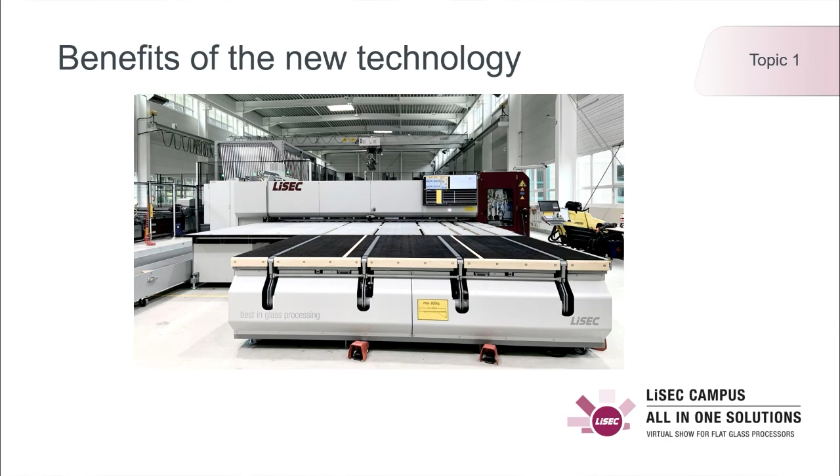Additionally, we saw that the laminated glass cutting demand, which we and you as a customer have to cut, is dramatically rising in the upcoming years. It is mandatory that we supply a solution that cuts more laminated glass in the same time, with better quality, much higher efficiency, and that means reducing waste glass and reducing costs.

So the three benefits we offer with the new technology are, as mentioned, better quality, less costs, and higher output. Now I will explain what is behind better quality, less costs, and higher output.

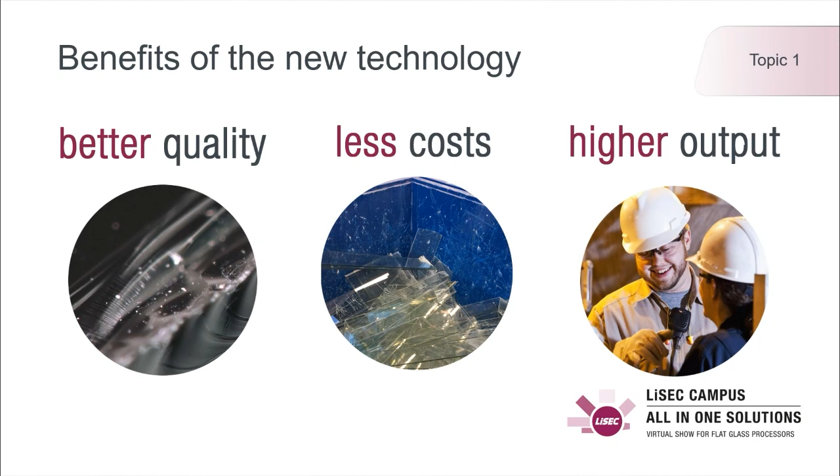Let's start with better quality. This is a very important point, because as we all know, the laminated glass cutting quality available on the market, supplied by all suppliers, is not always stable. Sometimes the glass is in good condition, sometimes in worse condition - the glass is stressed, the edges are damaged, etc. So we thought, what can we improve with the new VSL-A cutting technology to handle these different kinds of glasses, and how can we provide our customers the best result after the cutting process?

First of all, very high process stability is mandatory. What we did is a huge change in terms of our technology. For the last 20 years, we used vacuum suction cups to clamp the glass from the bottom side and open the gap between the two pieces of glass to cut the PVB layer.

This vacuum suction cup technology sometimes has problems with different glasses and stressed glasses, so we decided to develop the new technology called clamp technology. We no longer use vacuum suction cups, which sometimes caused problems. Now we use clamp technology.

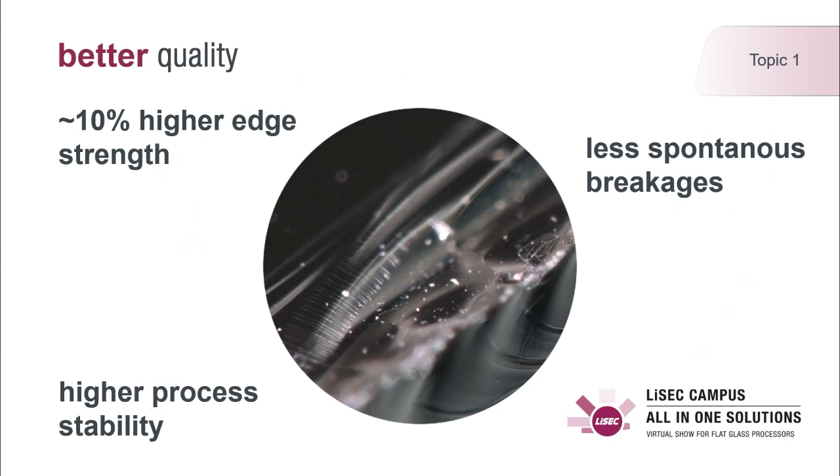You see here the number around 10% is the edge strength higher compared to other available solutions on the market. I will show you now in a short video how we found out these 10% during the tests.

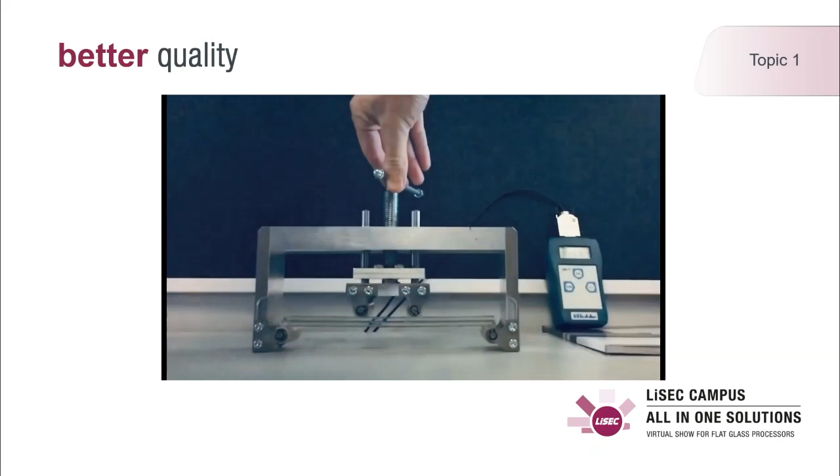This is a 3-point bending test. We cut a lot of pieces with existing technologies, laminated glass cutting bridges on the market, and we cut the same number of pieces also with our new VSLA technology, and started the test. We put these pieces into a machine - this is now just a model of the machine. The real machine is a highly optimized 3-point bending test, putting force onto the top of the glass and measuring when the glass breaks.

In this test procedure, we found out that there is a significant difference in terms of edge strength between existing technologies and our new technology. Our opinion is that because we have improved the cutting and the heating, we decreased the micro cracks, and because we decreased the micro cracks, this is the result of better edge quality.

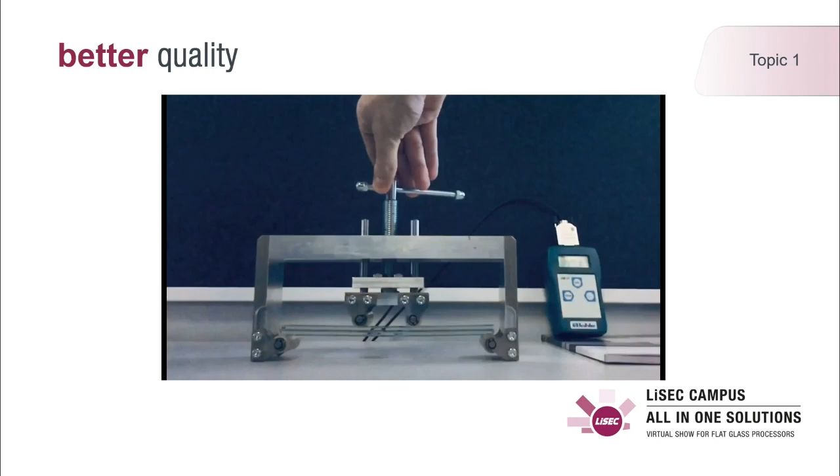So by the end, some further benefits of good edge quality. If you're, for example, someone who is processing glass, less grinding addition is needed. And by the way, the accuracy of the glass sheets which we produce with the VSLA is very accurate, around 0.2 millimeters plus minus.

Here we see a final result of this kind of edge quality. The surface is perfect, 90-degree angle, and also the dimensions are, as already discussed, 0.2 on the length side, and on the diagonal side plus minus 0.4 millimeter.

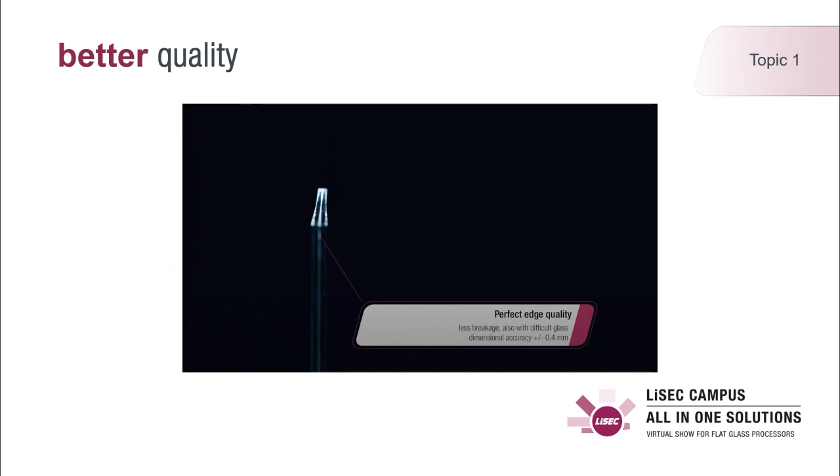Next benefit of the VSLA technology is less costs. So what are less costs, and how is the new cutting technology producing or guaranteeing less costs? We developed, as already mentioned, the clamp technology, and this clamp technology to separate the pieces now has just a limitation of 20 millimeters anymore. So it is possible to cut trim cuts on every side - on the front side, on the top side, on the rear side, on the bottom side - less than 20 millimeters.

And this has two huge impacts. First of all, the front trim cut is improving the quality. When the front trim cut is just 20 millimeters, this is compared to a length of 3.3 meters, just 0.066 square meters - more or less nothing what we throw away. So that means in numbers dramatically decreased costs when we talk about a front trim cut.

But having the possibility with the machine to always cut the waste cuts on the rear side of the glass sheet less than 20 millimeters as well, this is improving, generally speaking, the optimization result. And an improved optimization result has the impact that we decrease the waste glass. I'll give you just a number.

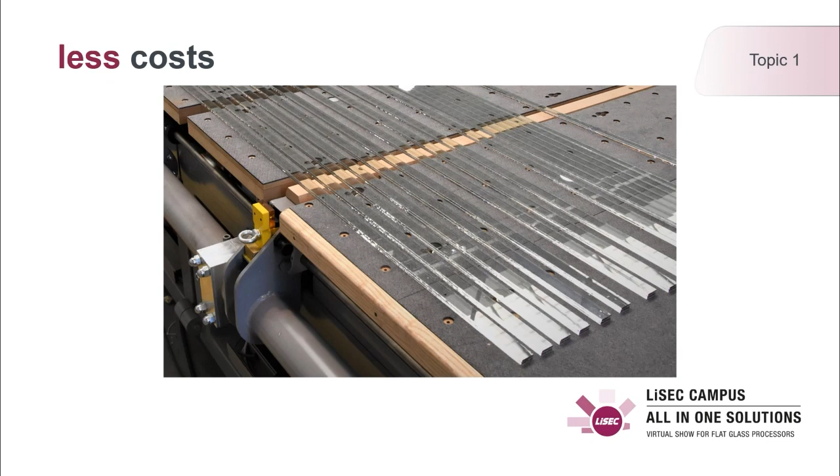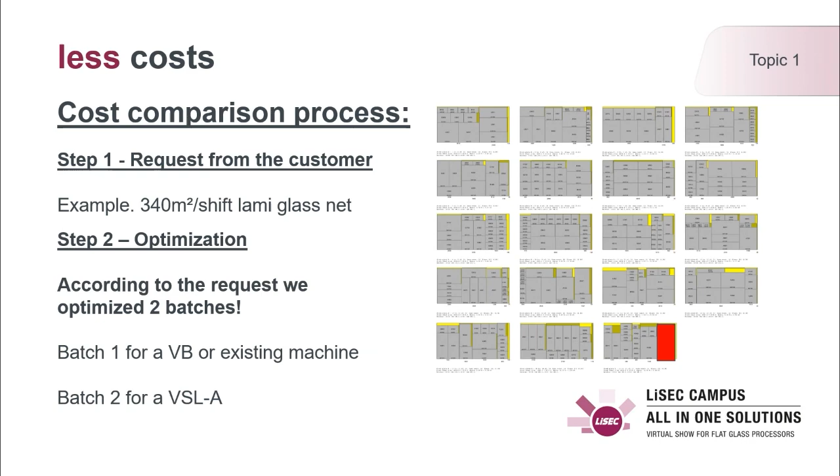Here's an example, which I also already mentioned - an optimization from a customer. The customer's request was: I want to cut 340 square meters of laminated glass per shift. We optimized the glass with his existing machines, and we optimized this batch with the new VSLA cutting bridge, and here's the result. On the left side, the batch took around 20 pieces of stock sheets to cut out these 340 square meters of laminated glass, with around 10% waste. On the right side, you see the same optimization, but there are just 19 stock sheets needed and just 6% waste. So the waste reduction is around 4%, and 4% in terms of money is a nice return on investment factor for your production.

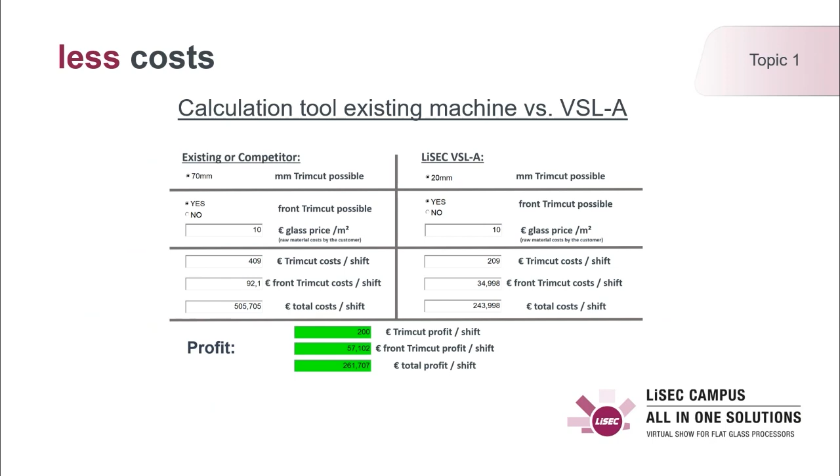So the next and last of the 3 AAA benefits is higher output. We all know that the number of laminated glass panels that need to be cut is rising, depending on government rules and also on customer demand for more safety glass. So we focused on how the VSL-A can produce or cut more laminated glass in the same available time per year.

Same optimization example from a customer who provided 340 square meters. On the left side, we optimized it with the existing technology, and we already know the number: 20 stock sheets are required. On the right side, with new technology from LiSEC, only 19 stock sheets are required.

So what does this mean in terms of time? We did measurements, and for the same 340 square meters net, with the existing technology it took 7 hours and 45 minutes. With the new VSL-A, we decreased the needed time to 6 hours and 46 minutes. So this is the same production in 1 hour less, which is a very good result, because now it's possible to cut the same amount of glass requested in a shorter period of time. There's 13%, or 1 hour more time, available for further production and further business you could process on the machine.

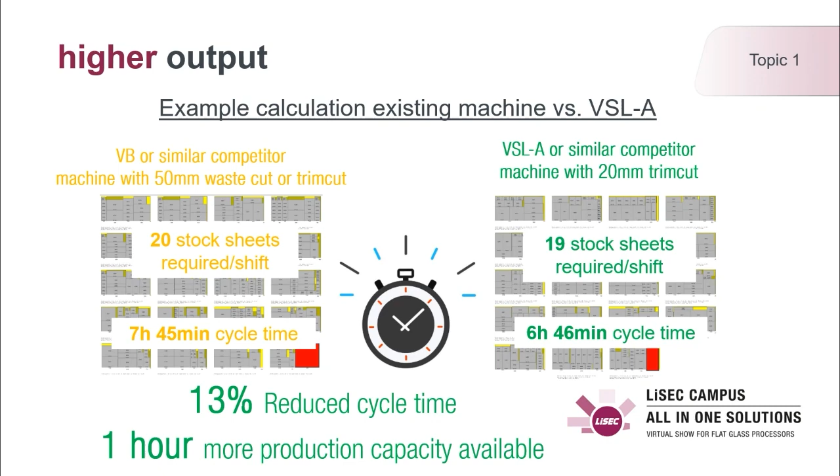Here we see a live cutting result to get a feeling for how fast the VSL-A separates a piece of glass. Here we see a 900 millimeter subplate, 2 pieces of 4 millimeter glass, 2 pieces of interlayer, and you see here the impact of the separation time versus the heating time.

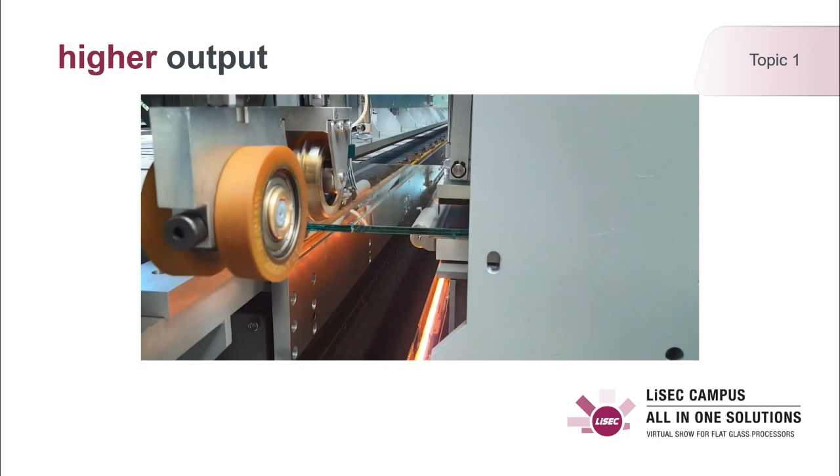The new machine is equipped with a newly developed heating system, and this heating system decreases the cycle time per cut dramatically, because we use much more power to heat up the PVB foil. We heat up just the PVB foil and not the glass, so we also reduce heat stress.

So now let's focus in detail on the heating technology I mentioned, the SIR heating technology. What we see here on this slide is a conventional heating system, which is most commonly available on the market, with 2 pieces of very long straight bars. These long straight bars have the negative impact that there's a cold gap between them, and the limitation of these long straight bars is also the heating power available. Just to get a feeling for it, a 3.3 meter heating bar of conventional technology on the market has a heating power of up to 6 kilowatts, and this is the physical limitation that exists.

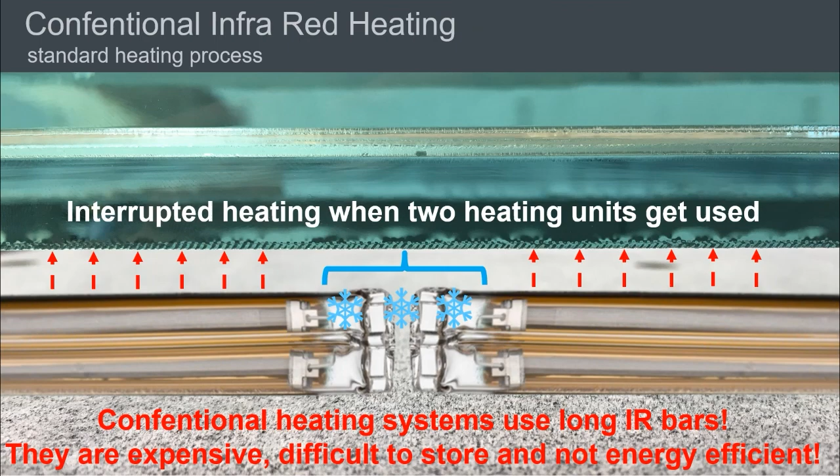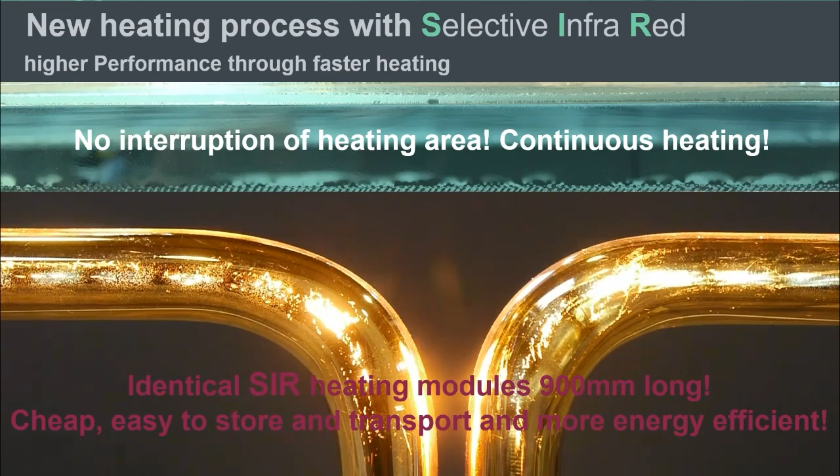We thought about how we could reduce the heating time and make more power available to heat up the PVB foil. The result was a totally new heating system. We use 900 millimeter long heating bulbs in line with a radius, and these heating modules, as you see here, are independently switched on. For example, when we need to cut a 3.3 meter plate, we switch them all on. If there's just a need to cut small subplates after the turning process, for example, we switch on just one of these heating elements.

Keep in mind, in one of these new SIR heating elements, there is the same amount of heating energy as in a conventional heating technology. So what I want to say is, in one of these 900 millimeter units, there is around 6 kilowatts of heating energy. The important point is that there is much more heating energy available, mainly focused on the PVB layer, allowing heating times of just 4 seconds, and we just heat up the PVB interlayer and not the glass. This is what makes the VSL-A so efficient.

So now you might think, yes, I have an existing machine, for example a VB from LiSEC. What can I do? How can I improve my production? I want to start first with solution number one.

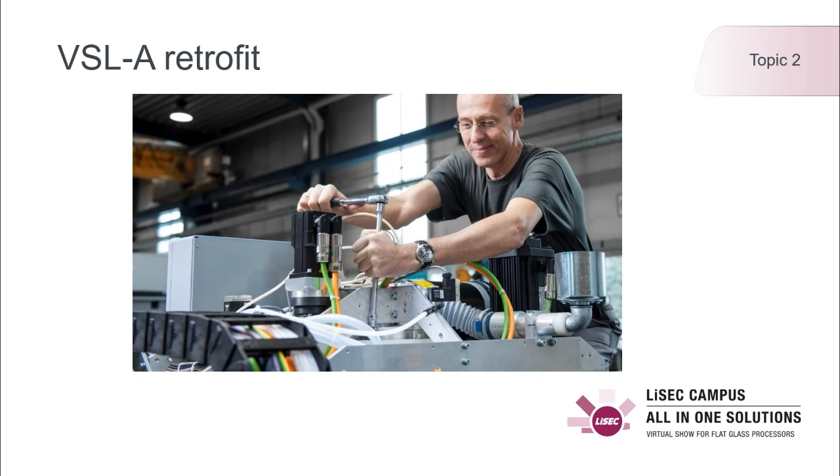Retrofit solution number one, described here with this layout. On the left side, this is your existing production. At the top, you see a combo cutting table with a suction cup bridge, with an existing VB laminated glass cutting bridge, currently cutting around 2 to 2.5 jumbo sheets of laminated glass per hour. On the right side, you see the retrofit solution, which we've done many times over the last 2 years, serving a lot of our existing customers with this new technology. So the cutting table stays as it is, if you want, and we just change the old laminated cutting bridge to a new version. The space needed is 100% the same.

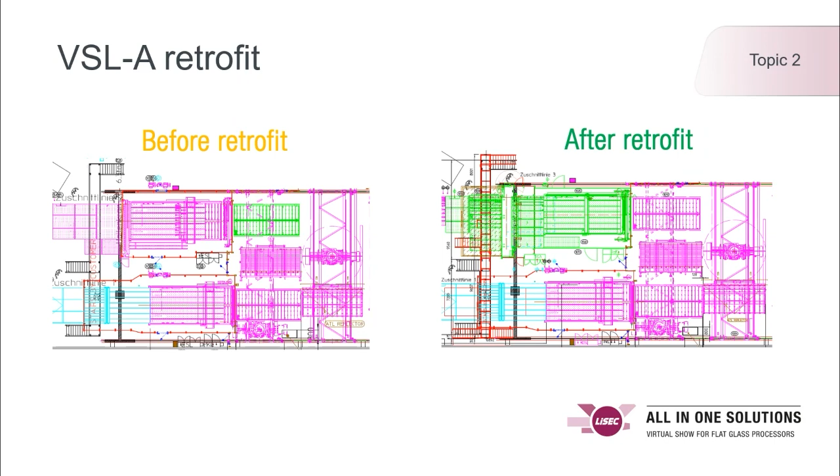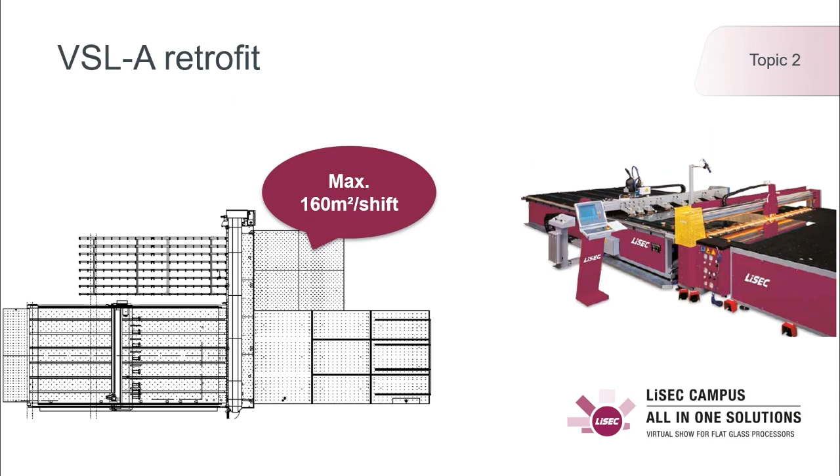The huge benefit is the amount of laminated glass you can cut more in the future. The existing solution has capacity for around 160 square meters per shift, or 2 jumbo sheets per hour. So let's see what it looks like when we change it to the new one.

We disassemble the positioning suction cup bridge from the cutting table, and we take away the laminated glass cutting bridge, the VB, and we replace it with a new VSL-A.

The benefits this retrofitting solution is providing are around 13 to 30% more laminated glass cutting output per hour, per week, per year, depending on the optimization result, up to 7% less waste, which has a huge impact on reduced costs, and up to 2.5 times less waste when we talk about the front trim cut.

For example, when a front trim cut is needed, the VSL-A is doing this job 2.5 times better than existing solutions. And finally, a huge increase in the rate of production, because the VSL-A is equipped with an automatic turning solution as standard, to turn every subplate automatically without any need of an operator.

Additionally, the VSL-A is removing the waste glass automatically into a waste glass container, so there's no need for an operator to remove the waste manually.

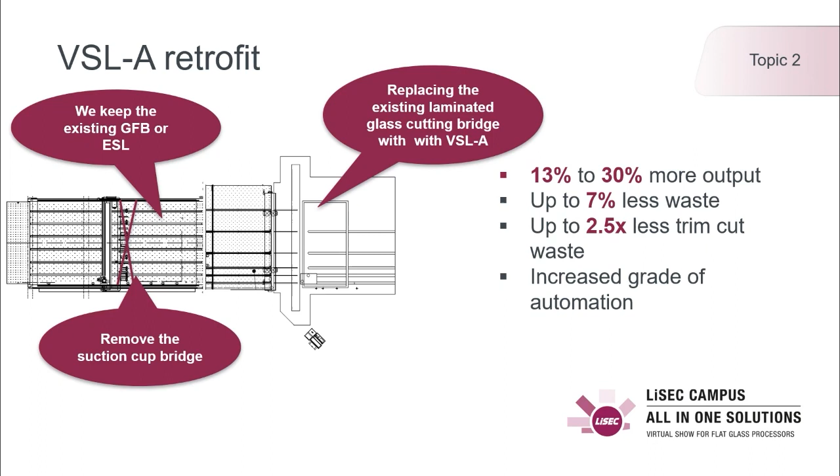So the job of the operator is to unload the final pieces, and the machine is focused on all further parts, taking care that your production is running continuously and producing the best quality in the available time.

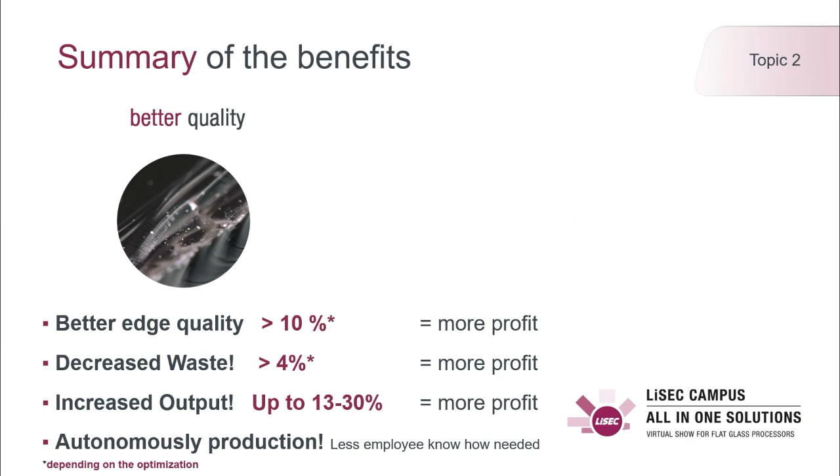So summarized again, the benefits this technology is offering are better edge quality, less costs, and a higher output. In numbers, around 10% higher edge strength quality, so reduced spontaneous break rate, and the result for you is more profit.

Decreased waste around 4 to 7% depending on the optimization. It's guaranteed. It's also, at the end, more profit, and a huge impact on increased output because of the turning solutions.

The automatic process, the faster heating, so around 13 to 30% more glass which the laminated cutting bridge can cut, and at the end also more profit.

And for all customers who don't want to change the existing machine to a new one, we also offer to retrofit just the heating system at available or existing machines to this new selective infrared heating technology.

This is a very easy job. It takes just 1 to 2 days from one of our technicians on site. The technician changes the existing heating system to the new selective infrared heating system with the 900 millimeter units.